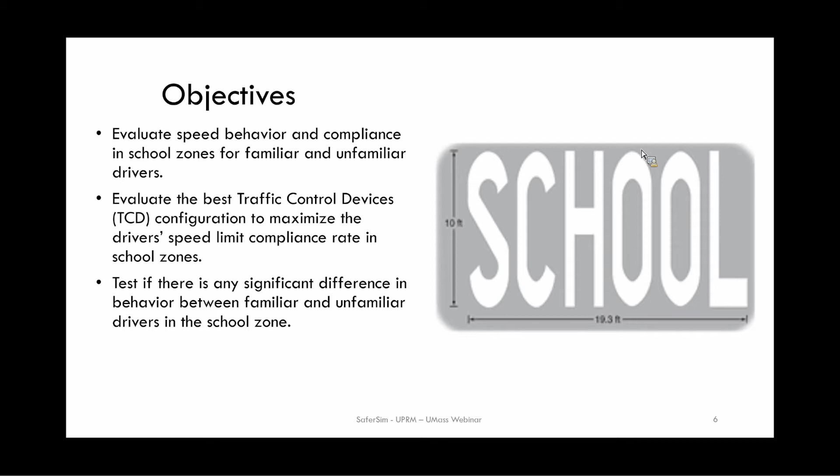So let me tell you a little bit about the roadway environment and its characteristics in terms of current speeding behavior, geometry, and signage. One of the studies performed in the school zone selected for this project was a speed study. As you can see in this slide, only 10% of the drivers comply with the 25 miles per hour speed limit. Definitely, speeding is a problem in this sector.

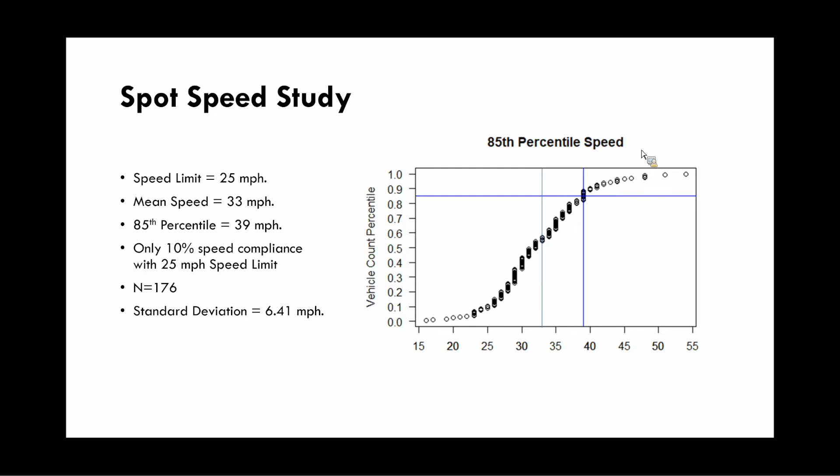Let me introduce now an overhead sign that was selected as the best alternative to improve speed compliance in a previous SaferSim project performed at UPRM that we would like to test in this collaborative project with familiar and unfamiliar drivers. This new sign, tested in the simulation scenarios, is an overhead sign that includes an indication that this is a school zone with the words school zone in green, zona escolar, when the speed limit or velocidad máxima applies when lights are flashing or con luz intermitente.

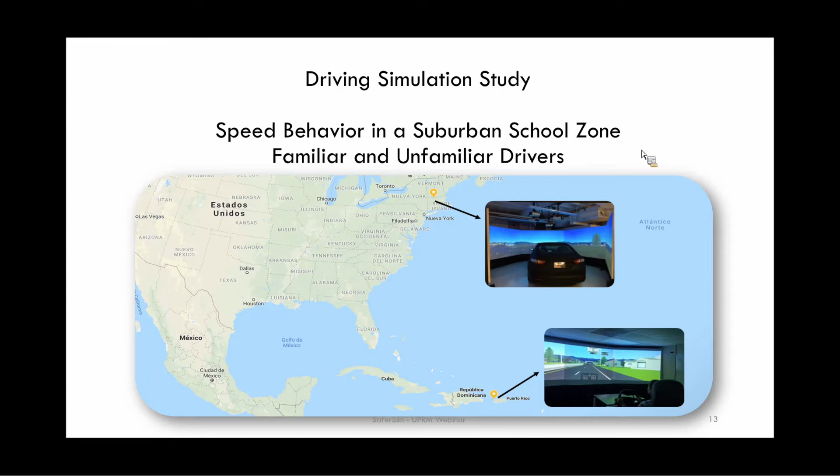Now I just want to talk you all through the methodology and the process that was undergone for the study. Again, as Didier mentioned, this is a collaborative project between the University of Puerto Rico at Mayagüez and us at UMass. You can go to the next slide, Didier. This next slide just shows you a quick screenshot of the two simulators that were utilized in this study. On the left, you have the non-full cab 3-screen projection driving simulator that is down at UPRM. And on the right is the full cab simulator that we have at UMass. Both of these simulators utilize the RTI driving simulator software. Next slide.

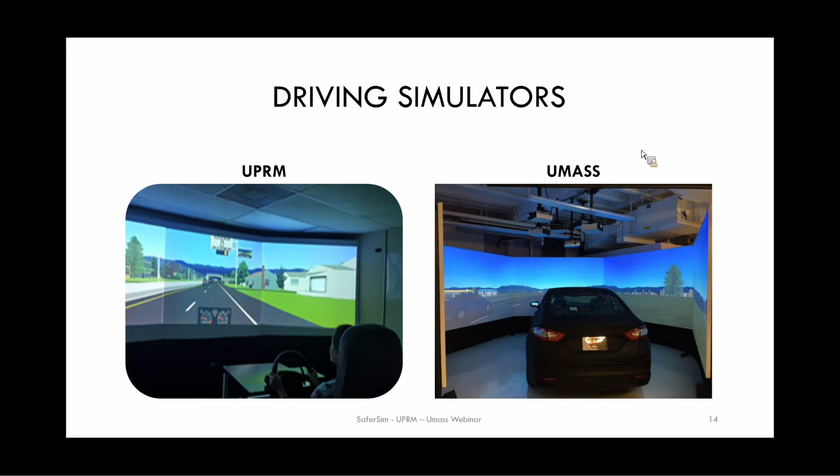And the data collection falls into the two groups, which are familiar drivers and unfamiliar drivers. The familiar drivers being those at UPRM in Puerto Rico, and the unfamiliar drivers, which were conducted in the driving simulator at UMass. And then we'll get into the statistical analysis and some of the conclusions and recommendations. I do want to note that the majority of this project was undertaken by Maria and the folks at UPRM.

We helped a lot with the running of subjects at UMass, but the majority of this project was definitely handled by our folks from UPRM. So next slide.

So again, the Samuel Adams School, which is pre-K through 9, has an enrollment of about 900 people. The main strip of roadway, PR2, that it's located on has that high ADT volume, which makes for some unique safety challenges. Being a major arterial with 45 mile per hour roadway speeds, although that school zone segment has 25 miles per hour, quote unquote regulated, there obviously are some challenges given the design of the roadway itself, as Didier alluded to previously. Next slide.

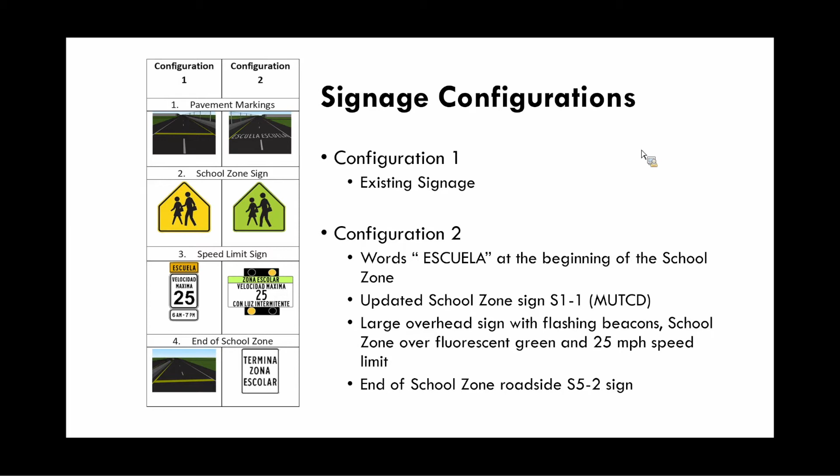And if we go to the next slide, it kind of shows the breakdown of where these were located. Yep. So essentially, in doing the analysis, the roadway segment was broken into 5 zones.

So 0 through 4. On the left here is configuration 1, which is the existing condition. And on the right here is condition 2, the proposed, if you will. And so, zone 0 is considered free flow conditions. So prior to the school zone, this is when the vehicles are at free flow. And then zones 1 through 4 each break down where those new or existing signs were placed.

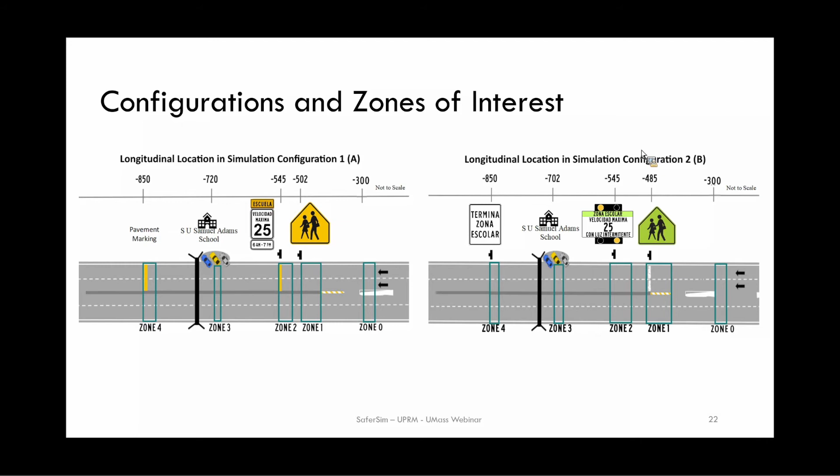Zone 3 being the location of the actual school itself. So right prior to that pedestrian bridge, that's where we had the vehicles present on the side of the roadway and/or the pedestrians on the side of the roadway as well. Next slide.

All right, so getting into some results. This is a little bit of an overwhelming graphic to look at to begin with, but I can break it down really easy. So this is just looking at the mean speed behavior from zone 0 and zone 3. So zone 0 being free flow conditions, so prior to that school zone, and zone 3 being, like I just mentioned, at that spot right as you approach the school where either the pedestrians were present or not and the vehicles were present or not.

So this is simply looking at unfamiliar versus familiar drivers in configuration 1 and configuration 2, and it's looking at that mean speed behavior across these 2 zones. So there are significant differences observed for configuration 1 with the existing traffic control devices, but there's even more of a difference for configuration 2 with these enhanced traffic control devices, and you can kind of see that with these highlighted red values on the right half of this table in configuration 2.

So it just highlights that there's some significant differences between what we're calling the difference, which is that mean speed between the unfamiliar and the familiar drivers, which is the main highlight from this table. Next slide.

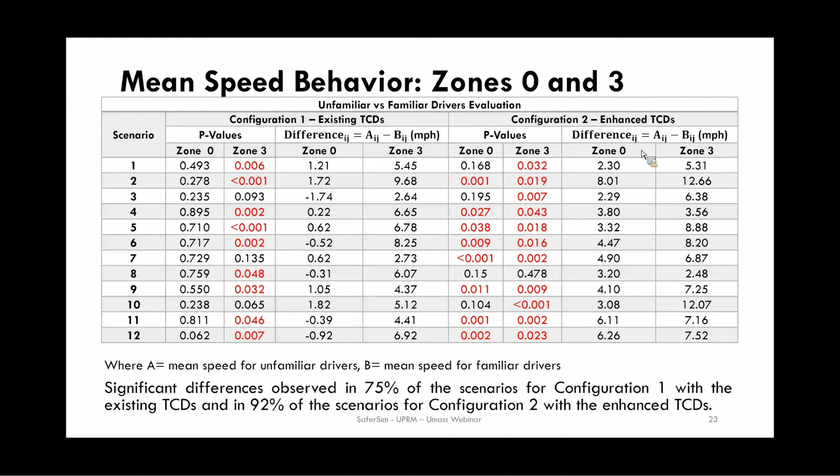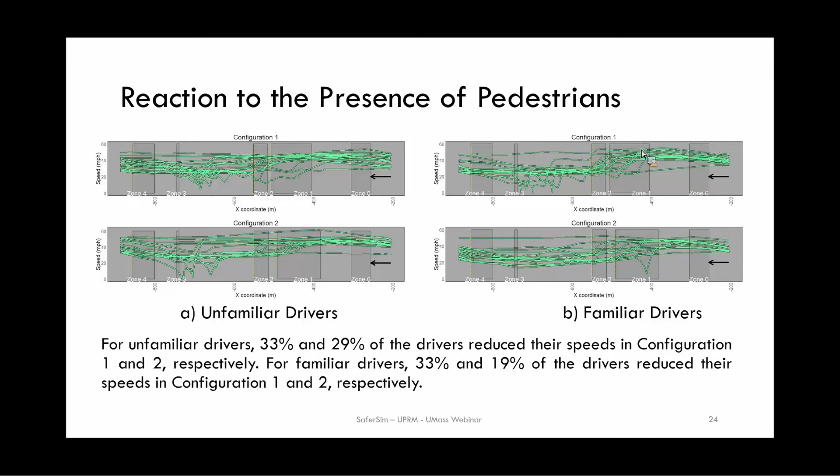There are slight dips as you approach zone 3 on that side, but overall, the most unique takeaway from this slide, I think, is the fact that at zone 3, you can see how much of an impact those pedestrians have on the drivers with that significant sharp decrease in speed as soon as they see that pedestrian on the side of the roadway. Next slide.

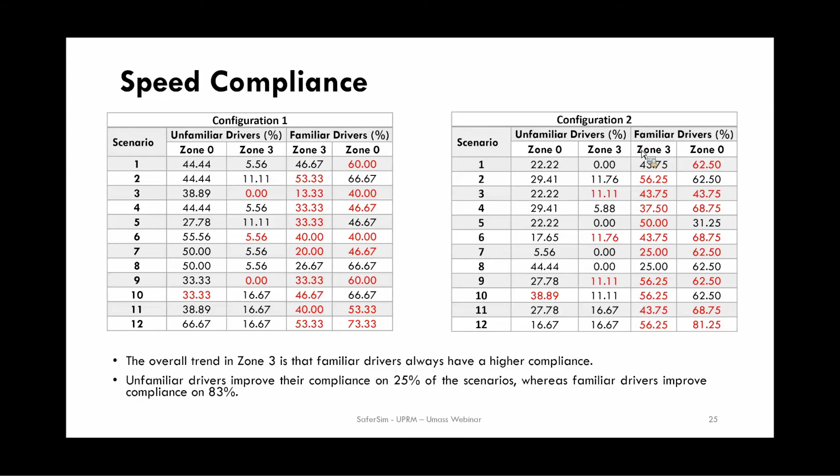And so with that, I'm going to transition it back over to Didier, who's going to wrap up with some conclusions. Thank you very much, Francis.

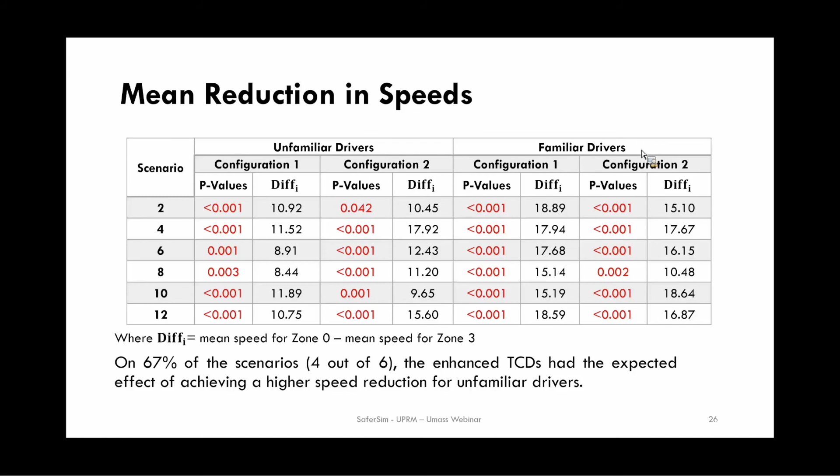Well, conclusions. I'm going to highlight a couple of aspects that we found to summarize our results. In terms of speed behavior, we can conclude that the combined effect of text in Spanish and the overhead sign with flashing beacons used as enhanced traffic control device is not necessarily apparent to unfamiliar drivers. The signs follow MUTCD colors and size, but the text in Spanish may have not been understood by unfamiliar drivers. From our school zone experiment, it was found that familiar drivers do not show significant speed reductions.

The reduction was observed in the case of unfamiliar drivers reacting to the presence of pedestrians close to the arterial street main lanes. And in terms of speed compliance, we found that by providing information in a clear and more visible way, it is possible to reduce speeding and crash severity. Our proposed traffic control device configuration showed a 30% improvement for familiar drivers and up to 11% improvement for unfamiliar drivers, which is good for these kind of devices.